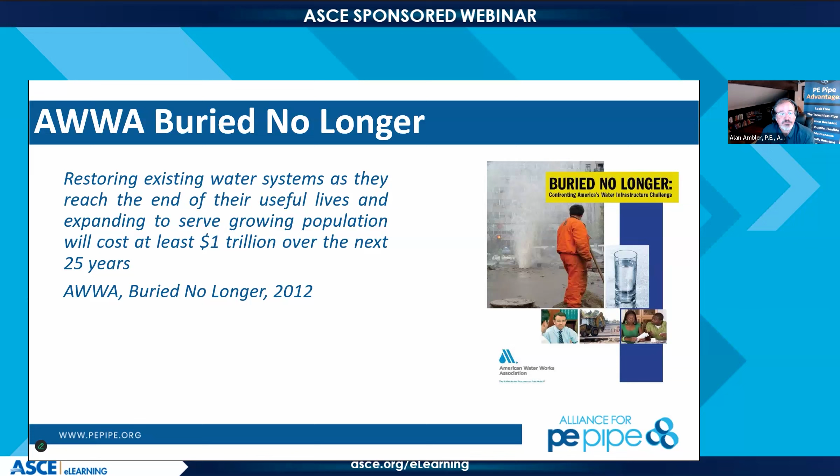So where are we industry-wide? AWWA Buried No Longer came out in 2012. It shows that we need at least $1 trillion over the next 25 years. We fast forward from 2012 to now, and this number hasn't abated. It's still pretty significant as to what is necessary to make your program funded, to go out and proactively replace that existing infrastructure.

There is a water main break every 2 minutes. That's a lot. That's not like 9 a.m. on a Tuesday after you finish your coffee. These things happen on Christmas morning, during the Super Bowl, that type of thing. So there's all sorts of emergency response that happens at the municipality to go out there and fix that infrastructure. We want to try to move from a reactive progression to a proactive progression, to go out and proactively replace this pipe.

HDPE can be used quite a lot in order to help you move to that progression as well. Everybody needs more tools, not less, to be able to replace our infrastructure as we see it. The Alliance tries as hard as we can to provide you with different elements to make sure that happens.

It is a leak-free pipe. That joint, when we fuse that pipe together, whether butt fusion, electrofusion, or some other type of fusion, is as strong, if not stronger, than the pipe itself. That's part of melting that resin to certain temperatures, allowing the molecules to flow across that interface, and then allowing it to cool. That joint is as strong, if not stronger, than the pipe itself.

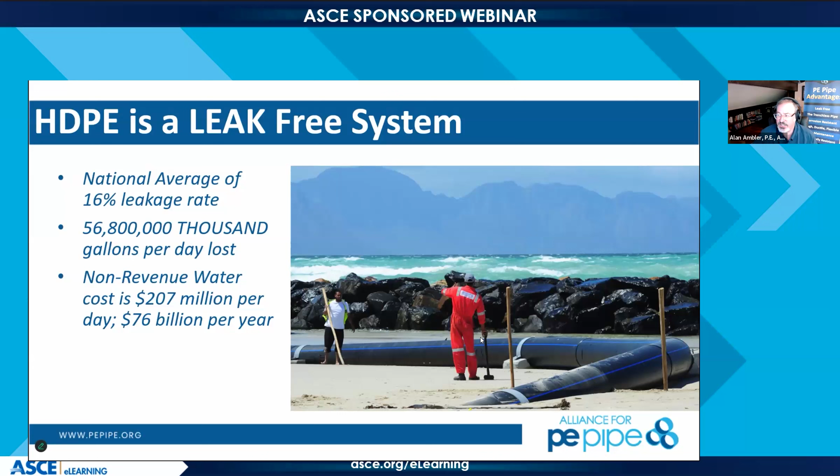It also provides that leak-free system we're looking at. There's a very significant amount of water loss in our national average of systems, and unfortunately there's not a lot of cost associated with it because we're undervaluing that particular provision of potable water. So even though there's a significant amount of water loss, sometimes we're not tracking it to the best of our ability, and we're not truly looking at the potential cost for it.

How do we look at it from a distribution and collection perspective? This is D&C that we're looking at. Based on all of the maps that we have, GIS records, as-builts, and other things, that allows us to look into our system and manage and operate it as we go through here.

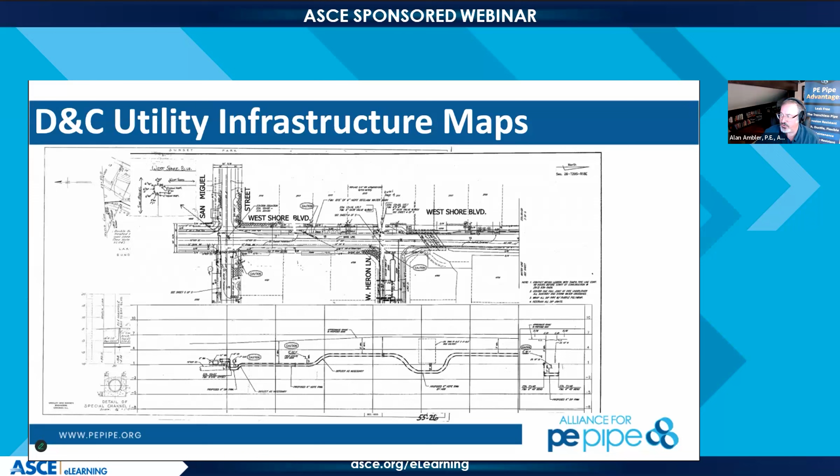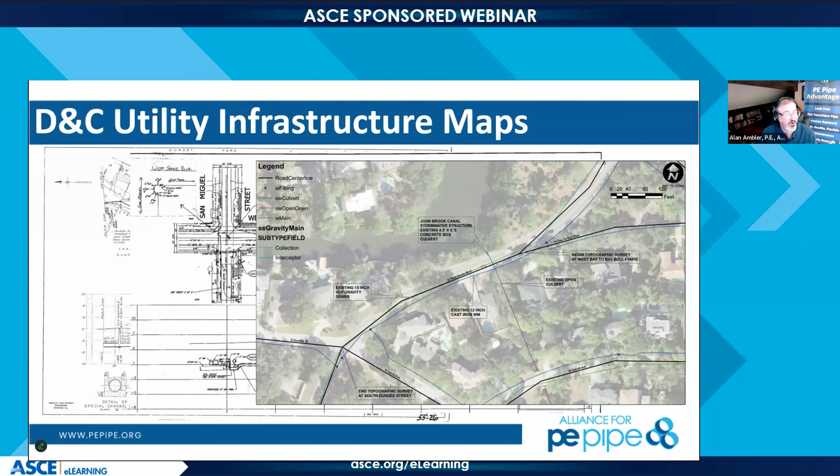Here's just a few examples for you as to how we start to pull all of this information together. A geographical information system, a GIS system, has data associated with mapping elements. We put those two together, and now we're finding all of our line work, which is our pumps and our pipes and other things of that nature. We're merging those things together to provide the information necessary to go out and maintain a system, and then also start to design a rehabilitation project.

Our distribution system has two components. Not only is there a reaction effort when we fix a break, but there's also the quality of the water inside the distribution system itself. Sometimes that water, if not used, can get a little old, or other contaminants can be in that process, especially if we have corrosive pipes, such as cast iron, ductile iron, or other metallic type pipes.

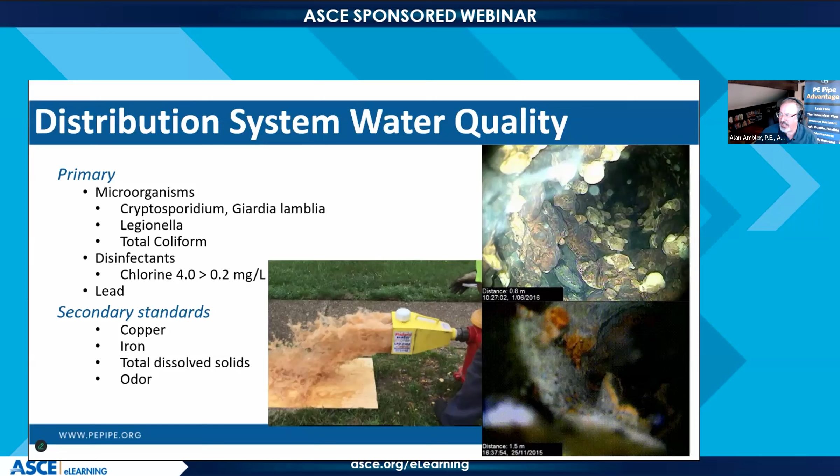So what are we looking at for the main lines? We go from main lines all the way to service connections, and in between, we really want that pressurized pipe to provide design pressure that allows us to operate the system at that particular pressure. We want to be able to provide for firefighting in its largest demand period. We want a life expectancy of 100+ years.

In parts of the country, we have a frost line, so we typically want that pipe to be below the frost line. Most of these main lines are located within a road right of way, in which case we have to make sure it's protected and free and clear of third-party utility conflicts.

So Steve, you came on. Did you want to add something to us here?

You spend a significant amount of time, Steve, on the operations and distribution and collection side to facilitate repairs and also installation of new pipe. So I'm going to hand it over to you now, and we'll keep talking about distribution systems.

Right, thank you Alan. As a waterworks distribution company, we're the guys you call when this happens, to put a repair band on that. The nice thing about polyethylene, though, is this kind of thing just rarely happens, because this is probably a corrosion issue over time, or a ground shifting issue that opened up this catastrophic leak.

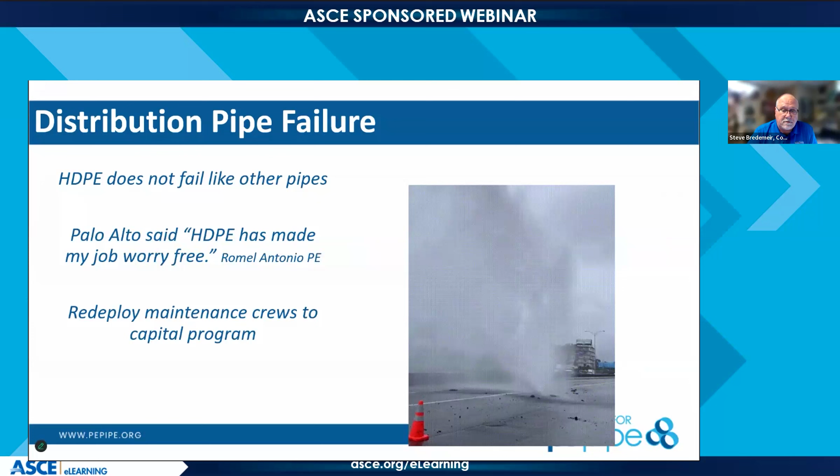And it's just the kind of thing that really doesn't happen very often in the waterworks or in the polyethylene world, because things like that, if it was in a gas main where they already use medium density polyethylene, those things are all on the news. These are fairly rare in the water industry. So, thankfully for that.

Yes, so we've got some case studies as well, Steve. There's a bit more meat that comes with the presentation itself, but I think we're going to go to Erik right now to talk us through this Albuquerque water main project he's been working on. So we're certainly interspersing some of the case studies with all the other information.

Yeah, thanks, Alan. So, yeah, I wanted to discuss the To'Hajiilee project that we are currently working on in New Mexico. We're right at the end of this, getting it completely put in the ground, buried, and in service and ready to go. It's been in the works for the last year or so now, but I wanted to visit this project because of the impact it's having, as well as the diversity of the HDPE being used and how they used it to accomplish the goal at hand.

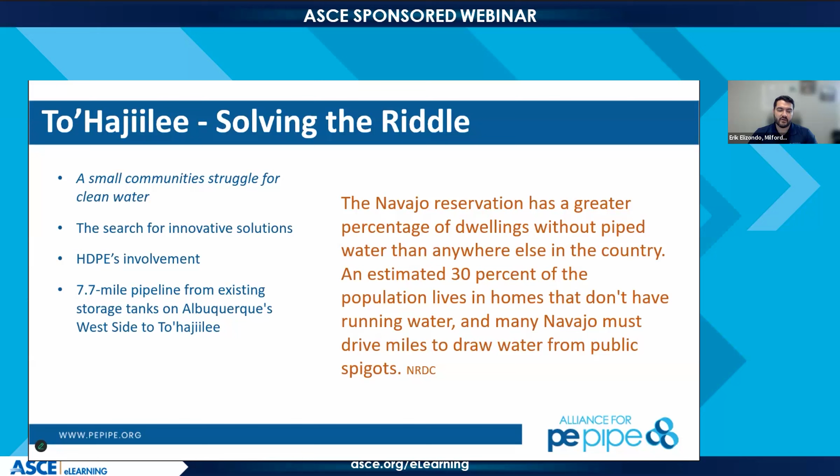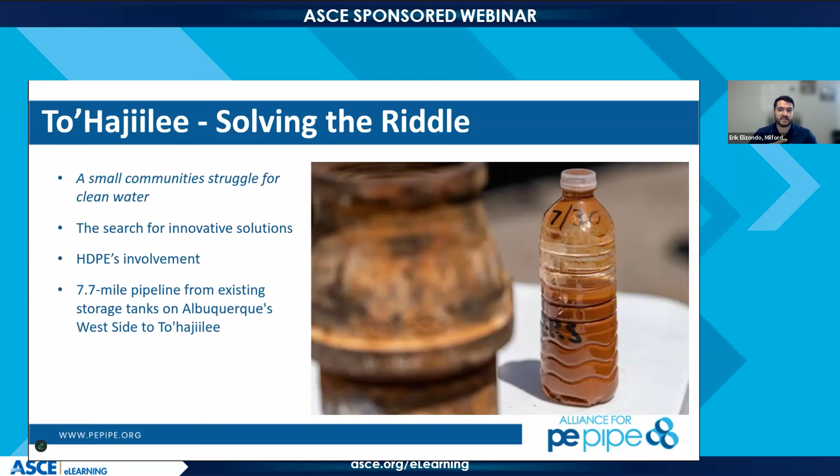Little fact: 30% of that population lives without running water in their homes, meaning they need to go to wells or bring in water from elsewhere. 30% of that population did not have water regularly running into their houses like we do day to day. I don't know about y'all, but considering what that would be like would have a huge impact on our own independent day-to-day lives, right?

And so the reason we want to talk about this is HDPE ended up becoming the solution for this small nation struggling for water. The county commissioner made a huge push. They had a lot of issues with land easements, dealing between the municipalities and the nations, and she made a huge push to get this through so they could get some type of water line put into service for these people, which actually ended up being decided in 2020, when she pushed for it.

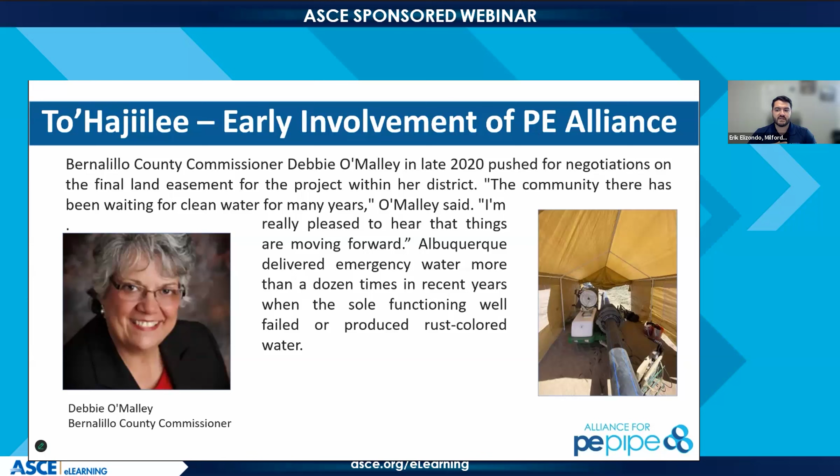The project ended up going off at the very end of 2023. All through last year it was a project in the works, and it's been wrapping up at the beginning of this year as well. But part of the problem was figuring out how to get the water from so far away to where it needed to go at the best overall cost, without too many changes in materials, and accounting for the differences in elevation from the origination to the ending point.

So from the beginning, we actually had Souder, Miller and Associates Engineering hop onto one of these presentations and hear about HDPE and all the things we talk about, and it sparked an idea about attacking this problem using HDPE. At that time, I believe that was back in 2022, when they reached out to PE Alliance and started getting more information and building a solution to the problem, which they would then present as the plan.

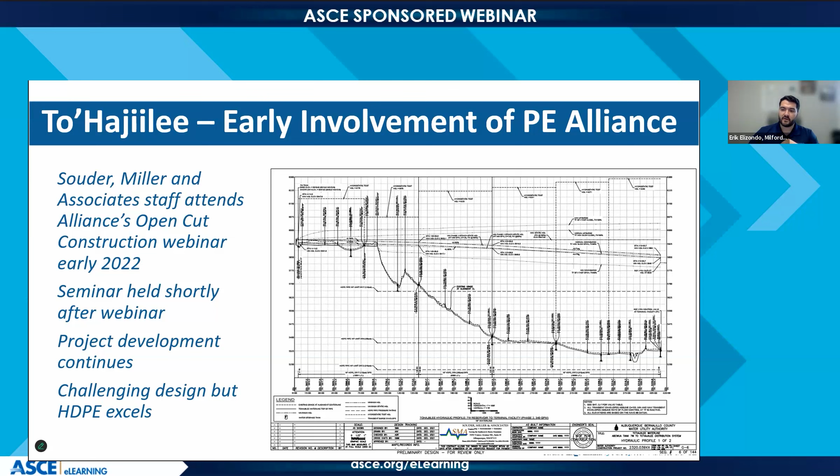So they hopped on this. We talked about HDPE, how to use it and integrate it into the system, and came up with a plan to install 7.7 miles of water line using HDPE, connecting to the Albuquerque Bernalillo County Water Utility Authority and taking that all the way out to To'Hajiilee.

Obviously there was all the back-end stuff to get the leasing done and the appropriate permissions done as well. That happened after they had the solution. The project came out for the world, like I said, at the end of 2023. Myself and my team in New Mexico partnered up with AUI out in that area to figure out how to help them accomplish this and get the best overall solution and pricing, saving wherever we could.

AUI had done projects in the past, but something like this was a little different than some of the things they'd done before. So utilizing the training we have to help them learn the water side of it all and

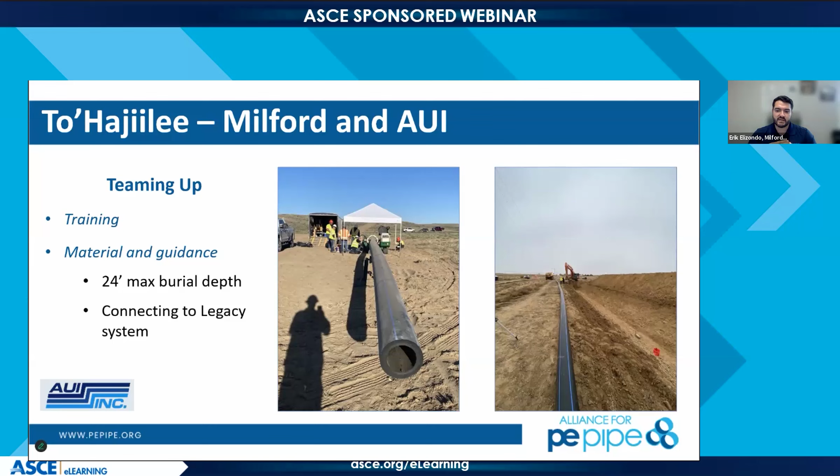help them learn how to install it appropriately was something that Milford and us teamed up on. Again, in this project there was DR7, DR9, DR11, and DR17. For those who don't know, that's basically the thickness of the wall of piping with a different pressure rating. The reason for the different DRs in this project was to accommodate for the elevations utilized here to maximize the flow.

The great thing about HDPE is that even with different DRs, you can fuse them together and they work like one consistent monolithic system, as HDPE is intended to do, right?

Between the beginning of Souder, Miller and Associates, to the PE professionals, to Milford, all the way through to the actual installer, there was an idea, a concept in mind in order to achieve this. Through the help of everybody involved, everybody on this webinar, we were able to get that installed.

So I see a question from Hector. I'll go ahead and answer that live. It is possible to butt fuse different DRs. The standard rule of thumb is to butt fuse either up or down 2 DRs from the DR that you are transitioning from.

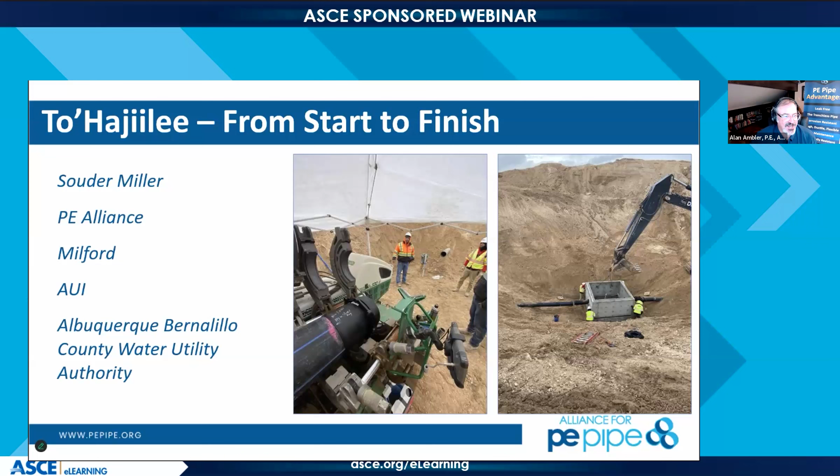I was going to comment on that too, Erik. Absolutely, thank you very much for clarifying. Our audience is always astute, and they're always right there to help us with this good information. I'm so glad it shows you're paying attention.

That's exactly what we want, for you to be able to pay attention to it. So we're going to move now into main lines and open cut. What is it that we look for through this open cut installation of the pipe itself? Steve, you want to take over and tell us about open cut?

Well, it looked like from Erik's pictures that most of his project was open cut. That's just the standard way to put in most pipelines in the industry, whether it's polyethylene or something else. I think we get into a rut where everybody looks at HDPE just for directional drilling, because it's about the only product you can use. But it works great in open cut.

You can narrow down the trench and not have anybody in the trench when you go to rope it into the trench. So a big part of the future for HDPE is just to put it in like you do other pipeline systems. One of the nicer things is you can narrow the trench because you don't necessarily have to have a trench box at all the points when you're digging, because of the flexibility of the product.

So maximizing productivity here, absolutely. By not having anybody in the excavation, we're simply able to take advantage of that long fused run and maximize that productivity. You're absolutely right, Steve. There's a backhoe that's just sitting there opening up trench. They're not stopping every 20 feet to lower a piece of pipe and home a bell.

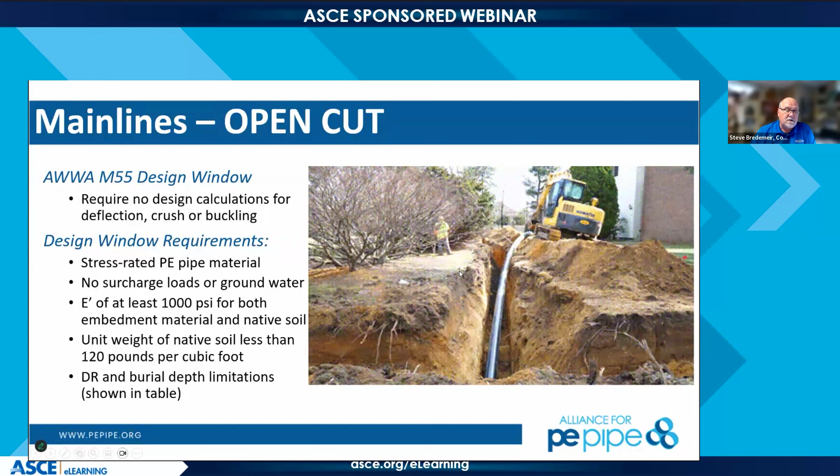So the design really isn't too difficult when it's exactly like other products you've designed in the past. We have the design manuals for polyethylene M55, and really in most cases there's not a lot of extra work you need to do to figure out compaction and things like that, because there's a design window that allows you to install pretty much like you do for any other piping product you're used to using in the waterworks industry.

But you can see we're able to put it around this S curve and eliminate some of the bends that would otherwise be necessary, or fittings, by taking advantage of that allowable bending radius of HDPE that we have.

Hey Alan, on that, yeah, last, we got a question in the Q&A. It's a great question, we get it from time to time. I'm hoping you can address it head on. If you're not going to have someone in the trench, how do you ensure proper compaction?

So mechanisms to be able to ensure proper compaction - this same excavator that we're looking at, they can take the bucket off of the front and then have some type of tamping or compacting tool on top of this excavator to be able to go through and make sure that you get that necessary compaction as we come through.

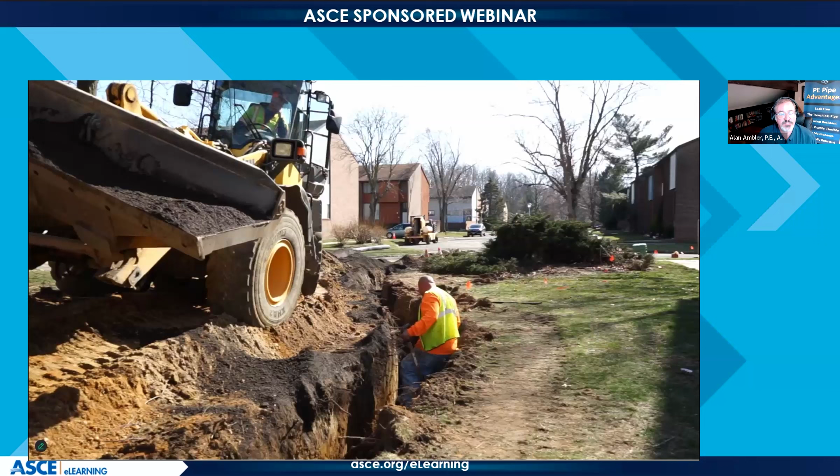Most of the compaction isn't necessarily for the pipe's health - it's going to be for the things that are on top of that pipe, to make sure that we don't settle flexible asphalts and other things of that nature. So great question, that's another function of having that parallel track here.

Erik, you got something to add? No, I'm just gonna go ahead and get on to the next slide. Absolutely, I do have something to add on the last slide.

The one difference between polyethylene and other products is, in that case, we don't need to put concrete blocking behind any of the fittings because it's a completely fused and restrained system. So you can eliminate all the concrete blocking that you typically design in a PVC or ductile system, because those concrete kickers are there to keep the bell and spigots together, right? Well, we don't have bell and spigots, so you can eliminate all that extra concrete blocking, which can save quite a bit of money and certainly time.

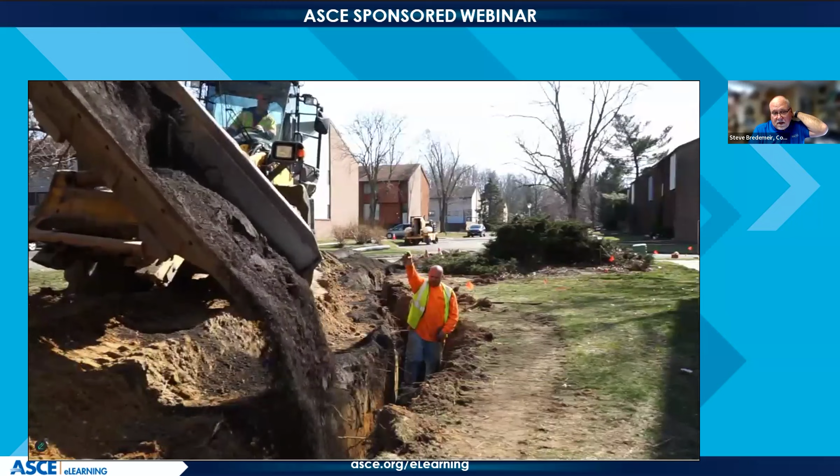Yeah, that's a great point, Steve. So, kind of elaborate on what you're talking about with the differences in HDPE in regard to other materials. A lot of times, when we start looking at connecting the legacy systems or using the legacy system products that have been used forever, like valves, a lot of times there's confusion on the connection to those materials.

The cool thing about HDPE over the last, I don't know, 25 plus years at this point, is the adoption of different types of fittings to be able to connect up to the legacy systems, allowing us to use all the same valves you would use in a standard PVC or ductile iron piping system. So with HDPE, you still have the same opportunity to use the exact same valves you would have used - you can still stick with your standard expectation for those fittings.

They came out with the MJ adapter, which you see on the slide, that is connecting directly into the valving system, which has an internal stainless steel stiffener to help with expansion and contraction at that conjunction, and connects up and bolts up the same way that you would connect up and bolt up with a Megalug or traditional PVC or ductile iron, right?

And that creates a completely fully restrained system. So your MJ adapter is fused onto the pipe or the fitting, and then onto the next pipe and the next pipe. And then when you come to this mechanical joint connection, the restraint is those, in this case, blue bolts - you would have to break those bolts to pull that apart. So that makes it a fully restrained system using the MJ adapter.

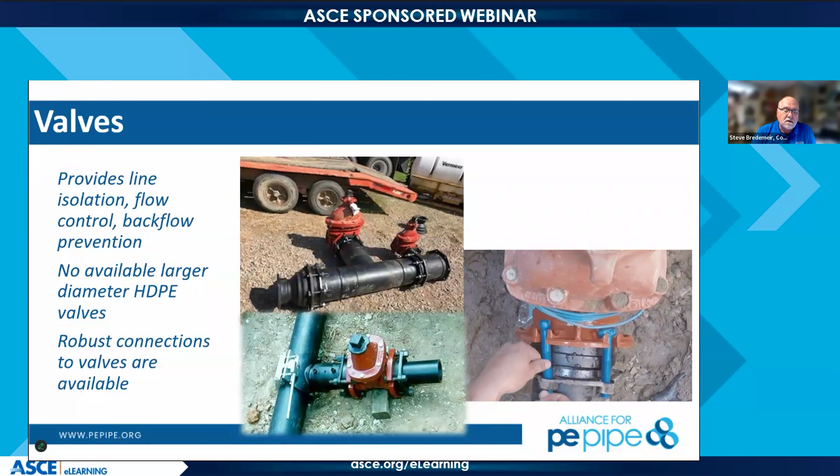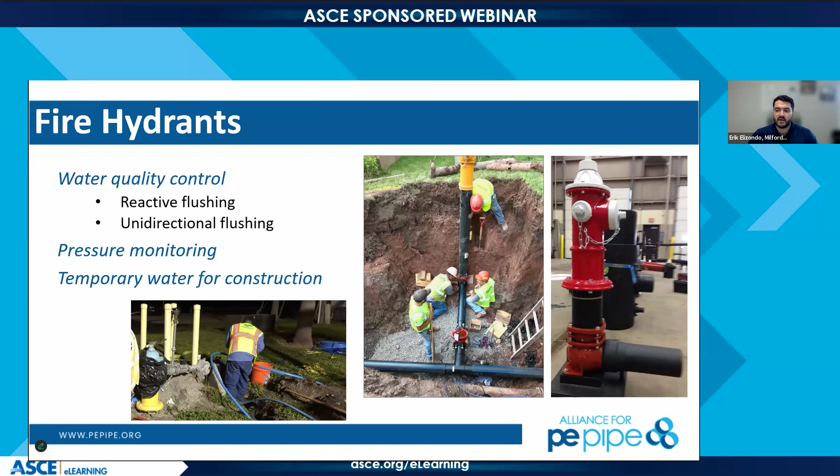So again, same thing - HDPE has taken a long initiative on trying to make it easier to utilize this in your potable water systems, or any distribution systems and collection systems as well, in order to integrate this into the system with little difficulty and/or resistance.

So this is the most common use of HDPE. You see this in conduit all over the country and on the gas side. But you can do main lines with HDD, horizontal directional drilling. This is just an alternative installation method, and it is by far the most common use of HDPE.

You can install it by pulling it in, creating less of what I like to call construction destruction. You don't have to tear up the entire road and haul off all the spoils and haul back in all kinds of backfill. You can fuse this long run of pipe together on top of the ground and then pull it into place, avoiding a lot of that construction destruction. Some fairly brilliant people in our industry said if you're going to use it for the hard stuff, let's use it for the easy stuff as well. So that's just part of it.

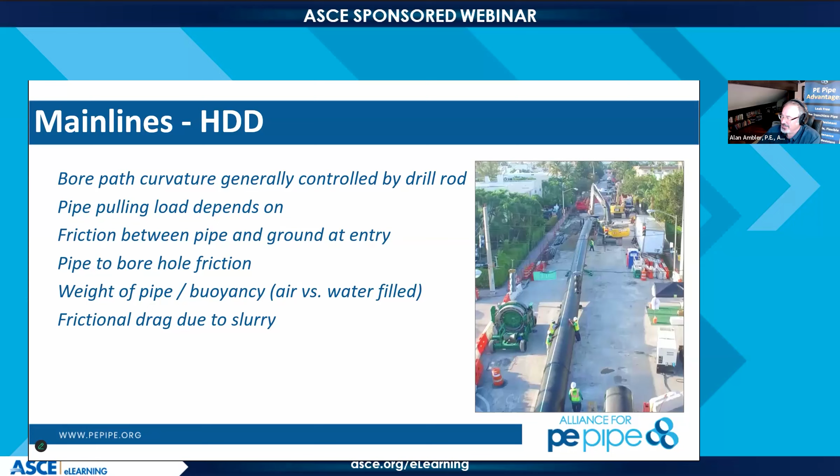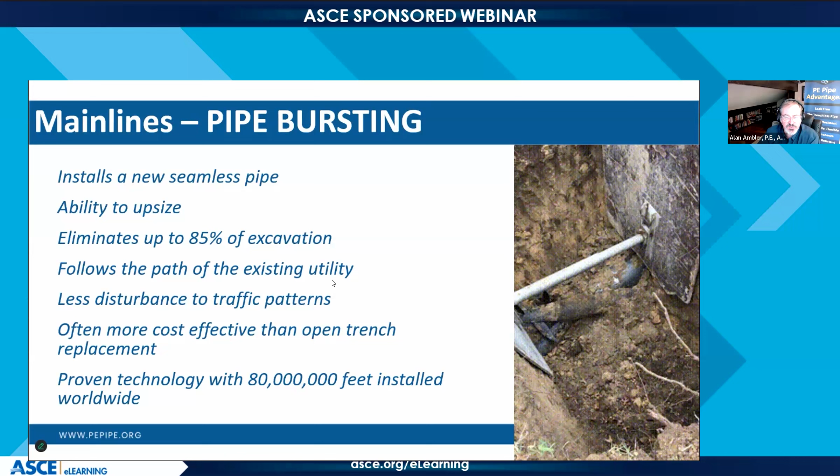Here's pipe bursting, which is the only trenchless technology rehabilitation method that can put back a larger OD pipe than what existed. Pneumatic pipe bursting uses an impact hammer driven by compressed air, and only uses HDPE through that process as it moves along, continuing to break the old pipe to create a temporary soil cavity surrounding it and pull back the replacement pipe. Static pipe bursting can use different pipe materials, but is just another way to provide the force required to do the bursting.

Slip lining itself is another rehabilitation method for existing pipeline, and it functions in the same fashion. We're essentially getting access to that pipe as we're putting new pipe within the existing pipeline, making sure it's clean and clear of obstructions through that process. Then we're pulling the HDPE pipe through that existing pipeline to be able to fit the brand new pipe to do what we need to do with it.

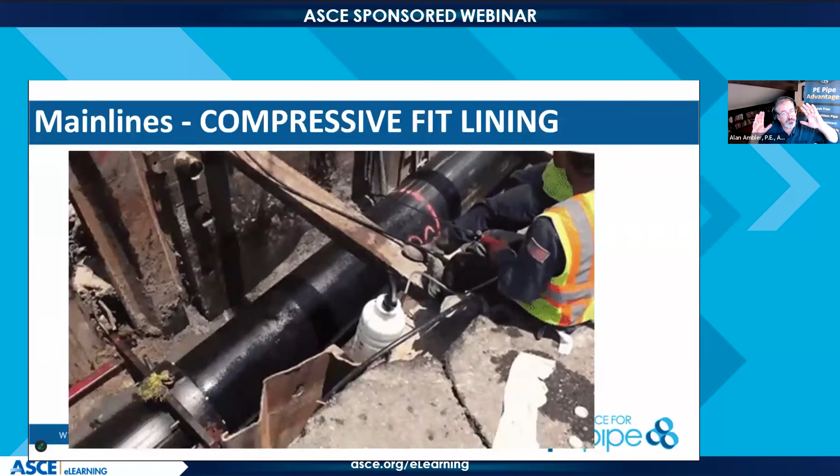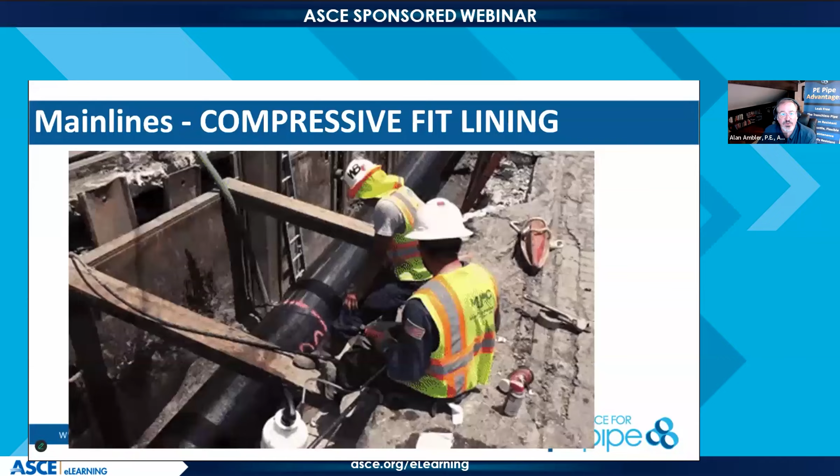Now, if we take that slip lining and put it on steroids, we get compressive fit slip lining. This is only done with HDPE. We're reducing the OD of that pipe through this die temporarily, and then allowing that pipe to relax, so it forcibly pushes up against the ID of the pipe we're slip lining through. It's taking advantage of the viscoelastic behavior of HDPE to provide this.

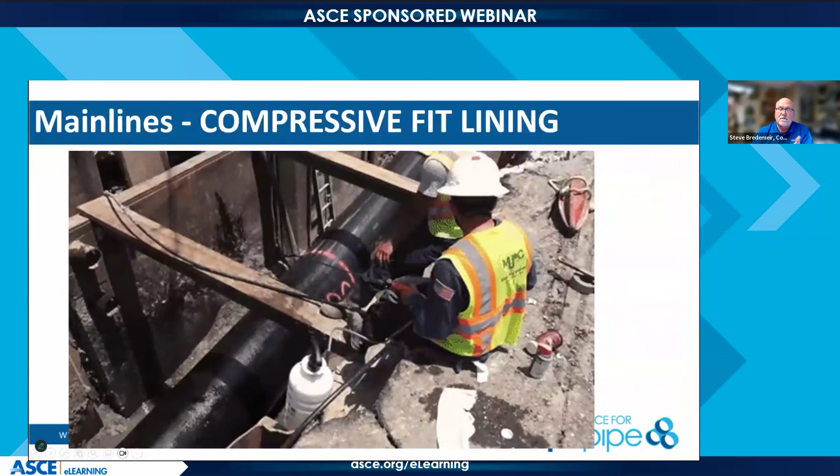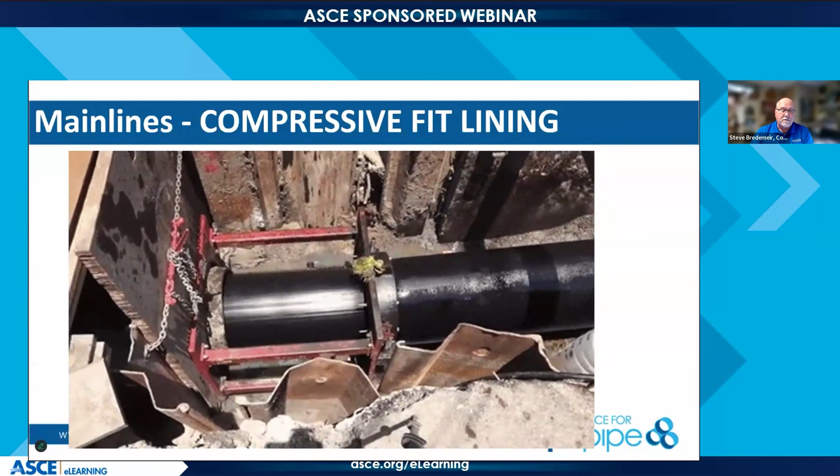So, Steve, take it away. Yeah, I'd like to point out that these last three installation methods—pipe bursting, slip lining, and compressive fit—all take advantage of the fact that the utility already owns that right of way. There's a pipe already there. You don't have to go out and find a new right of way or a new spot to put this new pipe. You're basically rehabilitating an old pipe where you already own the right of way and upgrading it to the 21st century. I think that's an important thing to realize on the advantages of utilizing those installation method technologies.

On the pipe bursting front, the target audience is anything very fracturable. So we're talking brittle pipes like clay and cast iron—those are the target markets for pipe bursting.

So thank you for going back there, Alan. When we're building these projects, we're adding service connections when we put in a new water line or force main. Over the years, all these things have been developed for polyethylene. They were originally developed in the gas industry—we're basically copying the products used in the gas industry since the 1980s, so it's really not anything very new, because the entire gas distribution industry has been using these products for 40 years.

Now the sizes are getting larger for the water industry, because water is not as compressible as gas, so our water mains are larger than our gas mains. Some of the larger diameters have been developed more recently, but the service connections have all kinds of different options. In this case, the gentleman has electrofused what looks to be a 6-inch lateral, and he's drilling the coupon out of the main line. Obviously that's not a hot line, or he'd be getting really wet when he ends up cutting that cookie out.

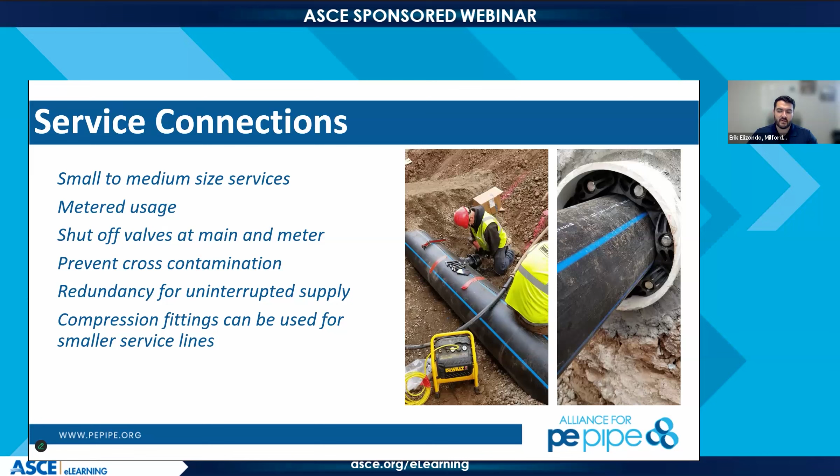But along with that, the ability to replace a line and connect services to your users, your citizens, as quickly as possible with doing something like a pipe bursting installation, just pulling it through, not having to open that trench, and all you have to worry about is reconnecting service lines, and how promptly and quickly you can go to it has been one of the biggest reasons SAWS has adopted it the way that they have.

And like you said, the cool thing about the HDPE is that there are several different ways of connecting those service lines. You kind of touched on it a little bit. There's still just the standard mechanical versions that you see in the other materials. On the next slide, it'll show the electrofusion versions of that, and two different ones, right? So there's just the standard electrofusion with a threaded outlet to connect up the same way people have been doing it for as long as can be. And then on there you have a tapping tee.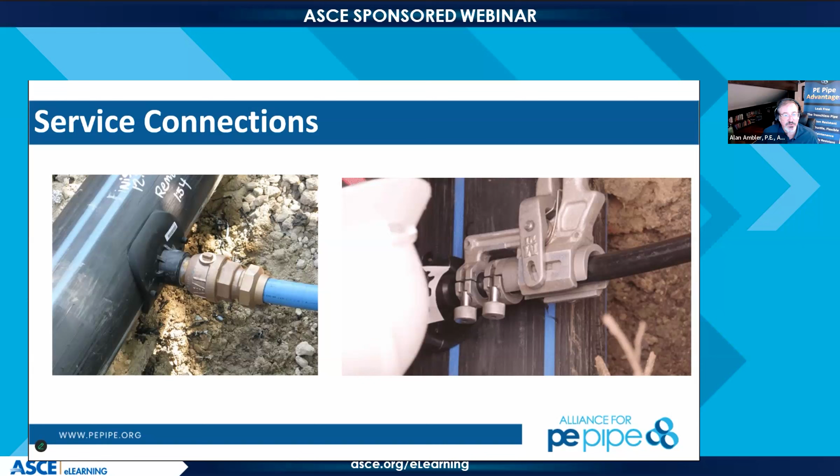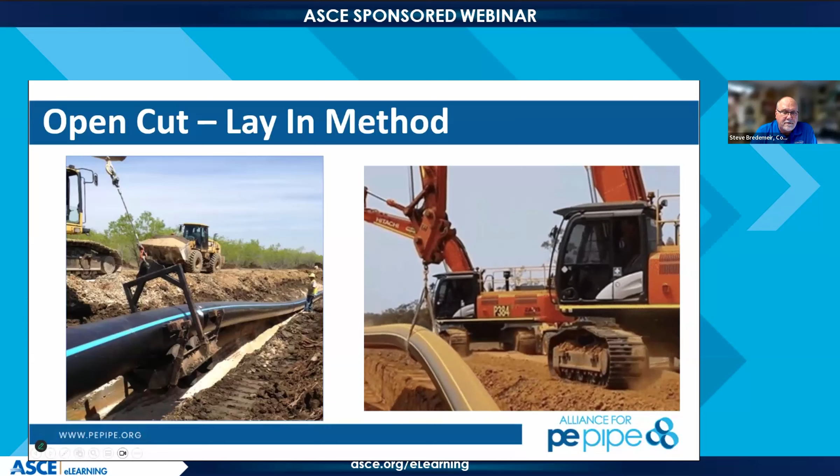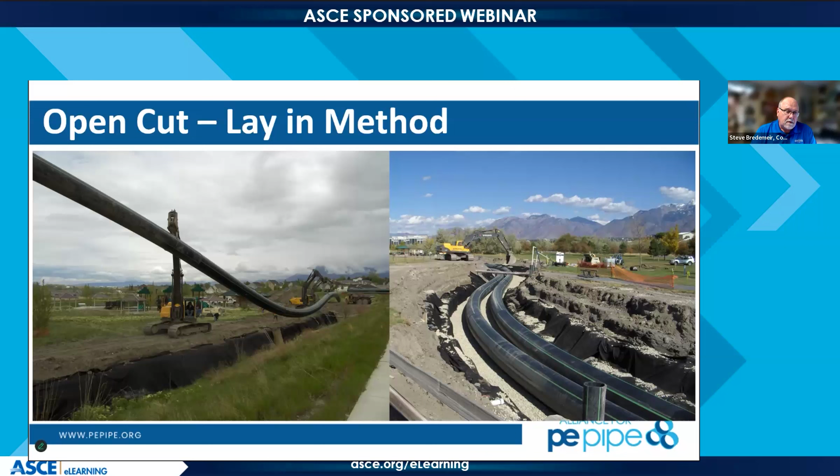These are just more great examples of how you can use polyethylene in the standard way of laying an open cut pipeline. They're roping the pipe into the trench. Obviously, those slip lining and directional drilling jobs are usually done in very highly congested areas, but when you're out in rural areas, you can get incredible production by fusing long lengths together and roping them into the trench, as you can see in these two pictures.

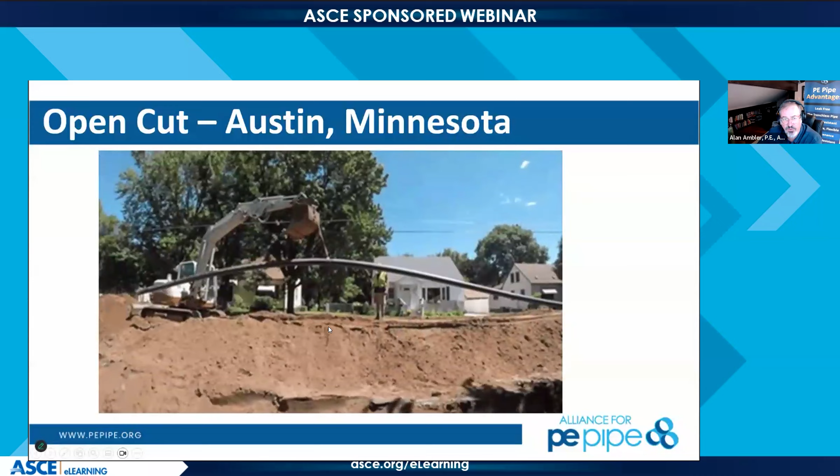This is another example of a municipality that decided to replace everything at once. So they're replacing the potable water main, they're replacing the gravity sewer, and we're simply taking advantage of that long fused run to be able to open up all of the earth at the same time. So there's certainly some convenience in this, but obviously these residents are impacted by this process. But one of the benefits of that long fused run is it allows for maximized productivity, and we're simply not in front of the residents for that long as we go through.

Here's some guidance from the Municipal Advisory Board. Steve, maybe you want to tell us about that. Yeah, so the Municipal Advisory Board is a group of users of polyethylene, so municipalities and water departments that came up with some standards for, in particular, electrofusion, which is just another type of fusion. There's butt fusion, and then there's electrofusion that are used commonly in the polyethylene industry, and they're really the same, other than where the heat source is coming from. For electrofusion, the heat source is coming from resistance heating wires that are built into the fitting, and we run a current through those wires, and that's the source of heat.

Well, the Municipal Advisory Board came up with some standards for installing these in the various sizes. And the reason they did that is because the manufacturers of these products all had their own standards. They were very similar. And this was true in the early days of the polyethylene pipe world, each manufacturer had their own standard for fusing their pipe. And then eventually they got together and created an American standard for fusing pipe that they all agree on. This is the beginnings of that. And you can get your operators trained to these standards, so they install these products properly. It's pretty straightforward. And again, each manufacturer has varieties of this, but it's all the same.

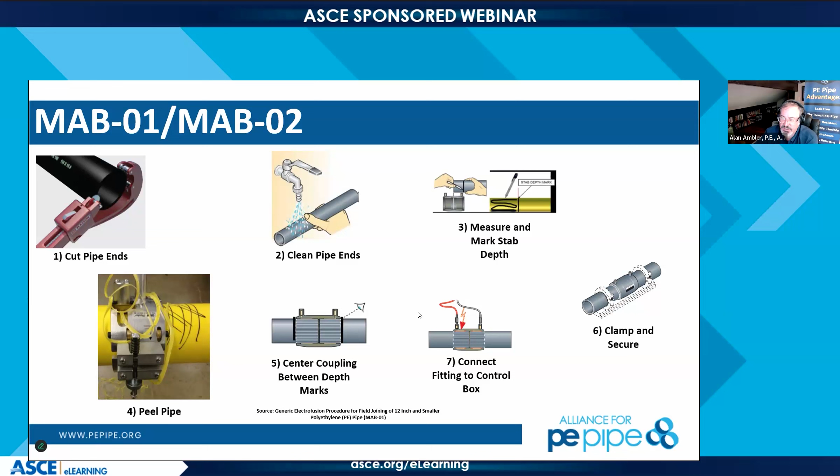So we're doing the same thing with all of this, with treating HDPE, when we get back to that virgin resin material, and we're heating it to appropriate temperature, whether it's butt fusion, electrofusion, extrusion, any type of fusion that we're looking at, we're getting to that virgin resin material and allowing those molecules to go across that surface. There's a little bit more operator-intensive stuff for electrofusion, but once you're properly trained, it's just as simple as all fusion itself.

And this slide just shows the anatomy of an electrofusion coupling. There's two zones. You're fusing two different pipes together with a coupling. You have 3 cold zones and 2 hot zones. The cold zones are there because once the material becomes molten in that section where the wires are, we don't want that molten material to flow outside of the coupling. So once that molten polyethylene material hits that cold zone, it starts to dam up and create pressure to allow the materials to mix between the coupling and the pipe.

The best analogy I can think of, if you can imagine the Hawaiian Islands when a lava flow happens, how that leading edge of the lava kind of curls back a little bit. That's what happens in the cold zone. And then that eventually stops, and then it builds up pressure, and that allows the materials to mix and create a fusion. So we're not really melting it, we're fusing it.

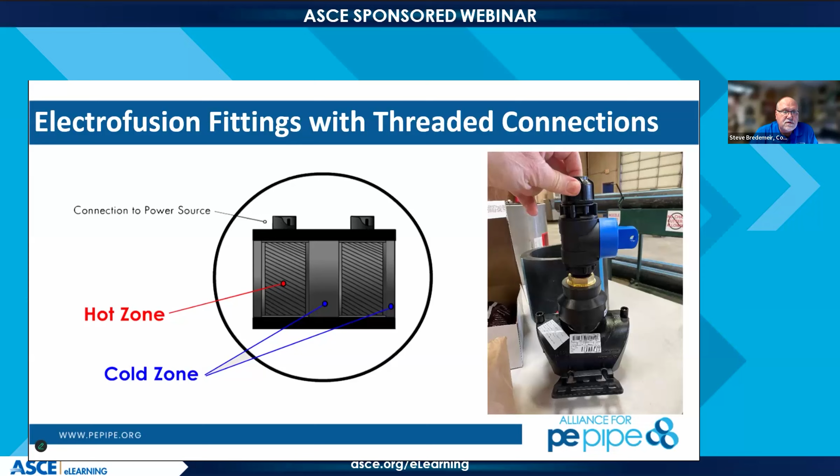Not sure if there's audio with this. There is. I muted it. I didn't know if you wanted to just talk over it. Erik, did you have something that you wanted to contribute there? I was going to talk to that further in a minute.

A lot of times, in the process of adopting HDPE, there's that learning stage of the appropriate ways to do things and making sure that the people doing it are certified and know what they're doing. And one of the most important parts of either butt fusion or electrofusion is the preparation. Especially with electrofusion, the preparation on the piping and on the couplings is very important.

Making sure you have a clean surface that you're working with, making sure, like you said, you get to the virgin material and have enough of the exterior of the piping peeled for the electrofusion couplings to come in contact with. And just making sure that your site is appropriately prepared for that is a huge thing, but it can be a huge help in scenarios where you're having to align piping that you don't have a lot of give, or when you're in tight spacings to be able to connect up.

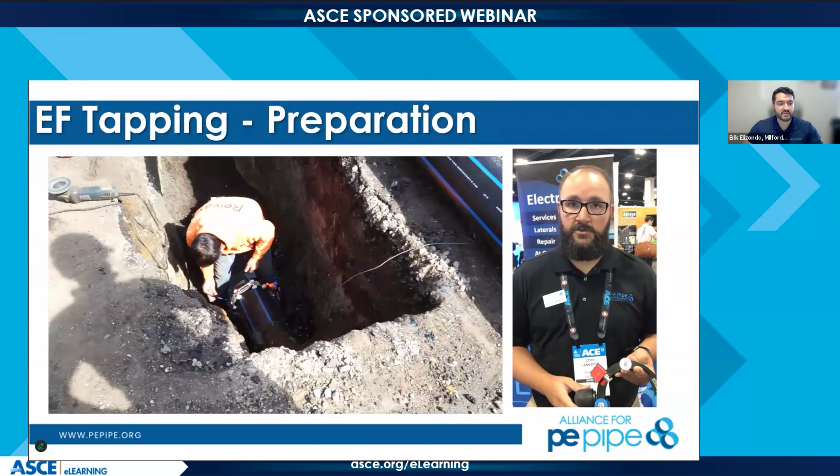Electrofusion can be a solution where you can't necessarily get a machine in there, and that's typically the areas in which we try to recommend using the electrofusion, in compact areas. And that's a great point, Erik. That mention of training and certified trained, that you only want people that have gone through the training. It's not that hard. Like I like to say, I'm qualified to teach this stuff, so it can't be that hard. But you do need to be trained, and it's every 2 years, because we know people pick up bad habits.

But like I say, it's a very easy process, but you as a designer, an inspector, or whoever you are, you want to make sure that the people doing the job are qualified to do it. And that will ensure a good project. This tool looks like it's pretty intuitive, and a lot of the designers of the tooling have thought through some of the efficiencies for us here as well.

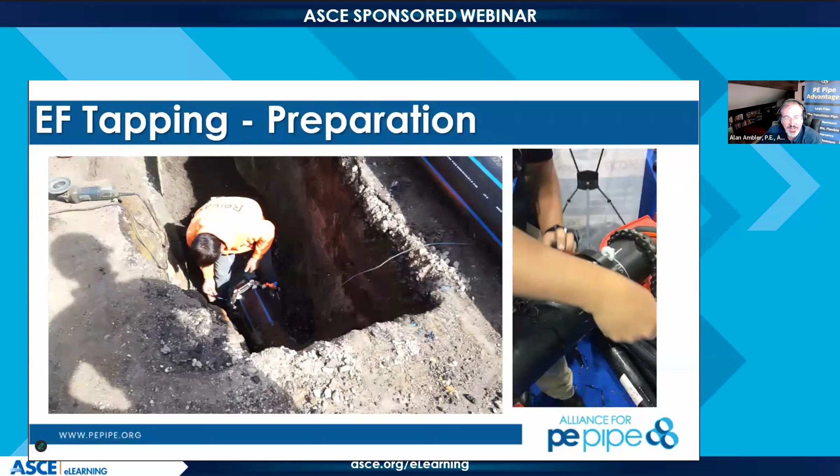So, I mean, he's just popping that on and going right through it, but we still need to maintain and understand the principles of why we're doing this type of work, and that's part of that training process itself. So, 20 years ago, a paint scraper was okay to use, and it's no longer okay to use because the tooling has gotten up to speed, for sure.

This is just a little example of a tapping tee that's electrofused on. You can see there on the left that they scraped it, or peeled it, and then on the right they're showing using the T-handle wrench to actually turn the cutter so that the tap machine is built into this fitting. They just take off that cap, put that T-wrench on there, and screw it down into the pipe.

The cookie threads into the brass or stainless steel cutter, and then when you back it back out, the water turns on. So it's a really slick system, and like I say, there are millions and millions of these in utility systems in the United States, and they're on the gas distribution side. So if anybody ever says we don't want to be the guinea pig, they're not the guinea pig. The gas industry has well vetted this product.

Absolutely. So this is called live tapping. So the water in the pipe doesn't shut off, so that way we don't impact all the residents as we're putting in a new service.

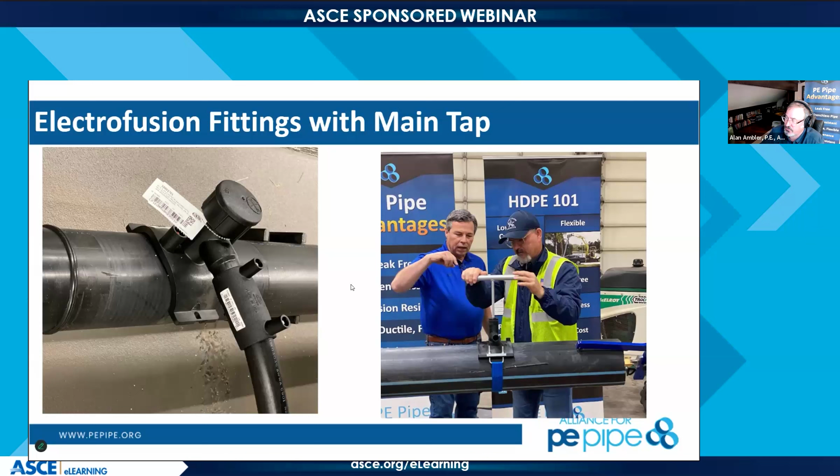So we've been reminded we've got to move along pretty quickly. So let's keep pushing through.

So what we're seeing here now is tracer wire. So high density polyethylene, or any plastic pipe, does not convey electrical signal. So we need different things to be able to locate this pipe. And here we have an RFID ball that sends a signal to the surface, tells us exactly how deep and what type of pipe we're locating there, but then we're also pulling tracer wire, which conducts that electrical stimulus as we're coming through, and we put that through this process as well.

Not ironically, today's modern tracer wire is no longer that THHN meant for electric use in your house. It actually has an HDPE jacket on the outside, and the reason for that is because it's so durable and good for underground installation. Let's use it for that and for the main lines as we go through.

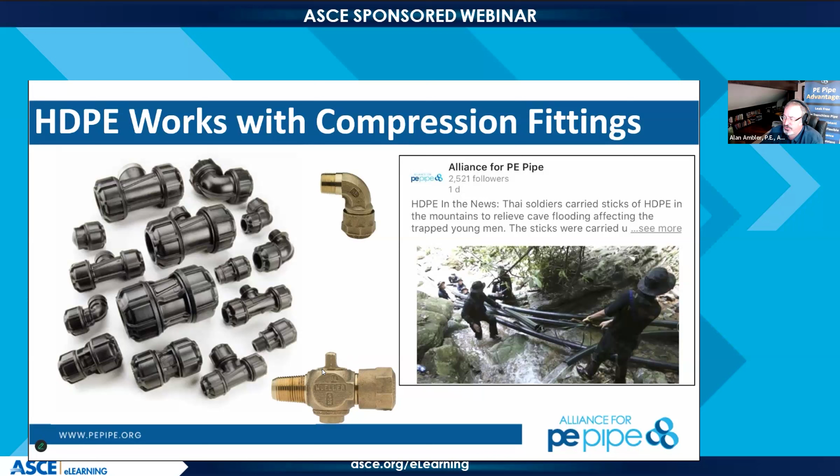As Steve has said, there are many different types of fittings, and these are just examples of the types available to you. Anything you have a preference for certainly works in that manner. We also work with compression fittings, all rated to 150 psi, as we put a compression fitting through this. This is often used for temporary service above ground or just that small service line. All those other fittings we've shown you also have threaded capacities to work with your favorite brass fitting.

Polyethylene is just so durable. You can drop it and it doesn't break. You can bend it and it doesn't break. But just because you can bend it a lot doesn't mean you want to, because you're storing a lot of energy. And just because you can take a backhoe and knock it off the back of a truck at a quarry, that doesn't mean you should, because that's obviously a dangerous operation.

So the industry, PPI, came up with proper pipe handling guides, which if you're designing an HDPE project for the waterworks world, I would suggest you refer to, because it's longer pipe, it's more flexible, and there are some considerations that are different.

Beyond that, the nice part for us as a distributor is that when we have material in our yard, all our pipe for the water industry is black, and the reason for that is it's basically sunscreen. They put 2% carbon black into the pipe material, mixed in with the resin, to protect it from sunlight. All that carbon black does is convert the UV energy hitting the pipe into heat, so it dissipates into heat rather than destroying the molecules of the pipe.

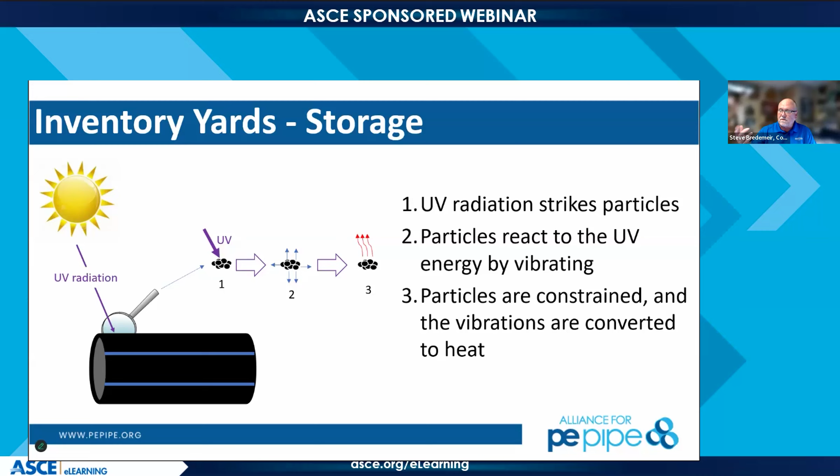If you had... I think there are some slides ahead that show other products susceptible to UV degradation, so we have to be careful cycling those products out of our distribution yard. We would never have anything like that in our pipe yards, but that's just pipe that sat in a municipality's yard for years and got damaged from UV light.

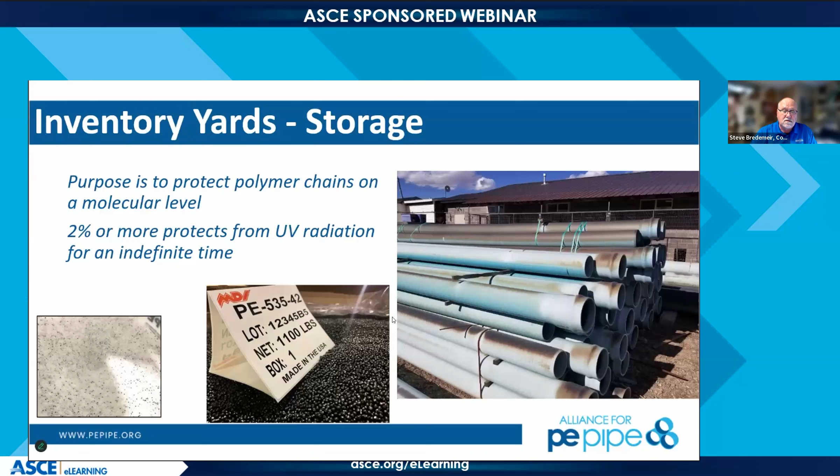The gas industry protects their yellow pipe, cycling it through and managing inventory to make sure it gets in the ground within 2 years of being manufactured. But that's not the case with polyethylene, with black HDPE. It's protected from sunlight for a lifetime. You can operate it above ground, like in those quarries, for a lifetime because it has the carbon black.

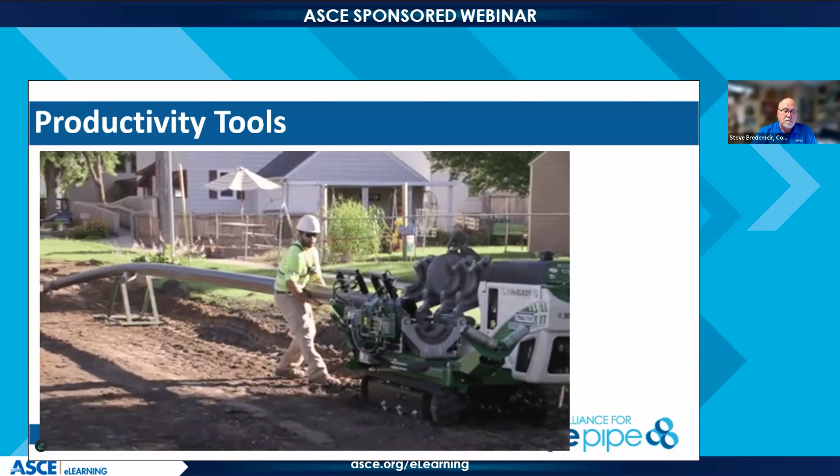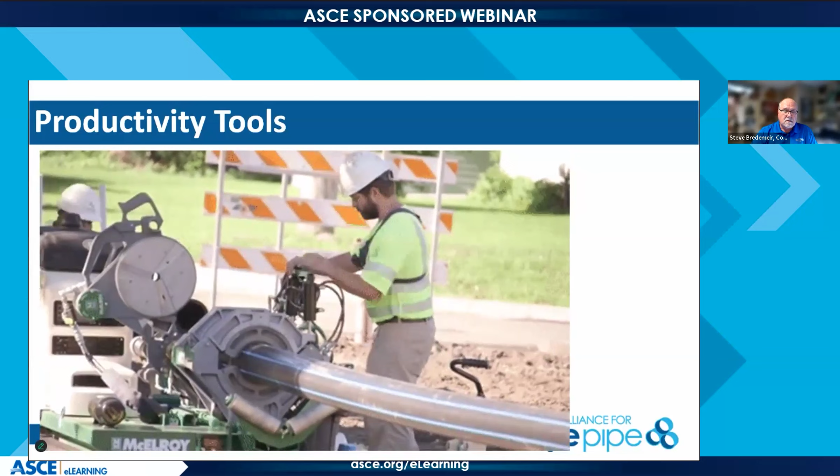Over the years, McElroy, the main manufacturer of HDPE fusion equipment, has developed many tools. The TracStar helps with productivity. The hydraulic clamps that clamp it down help with operator fatigue, and roller systems help get things loaded so you don't have a bunch of extra equipment on these medium-sized jobs having to load pipe into the machine each time. These productivity tools have really developed a lot over the 25 years I've been in this industry.

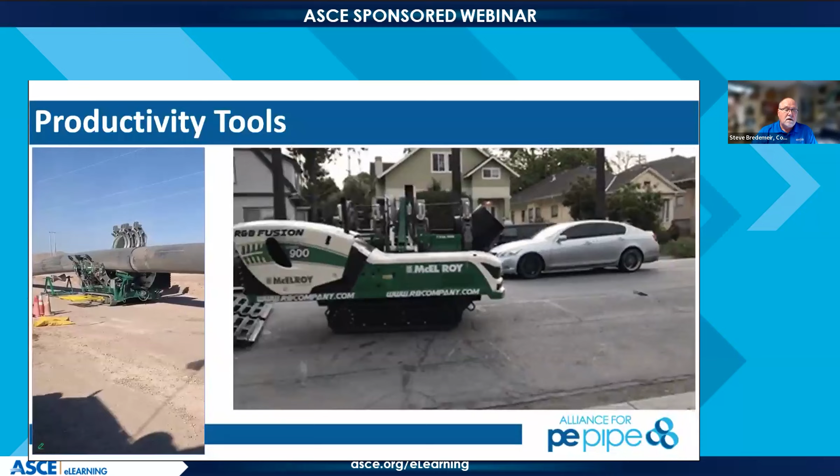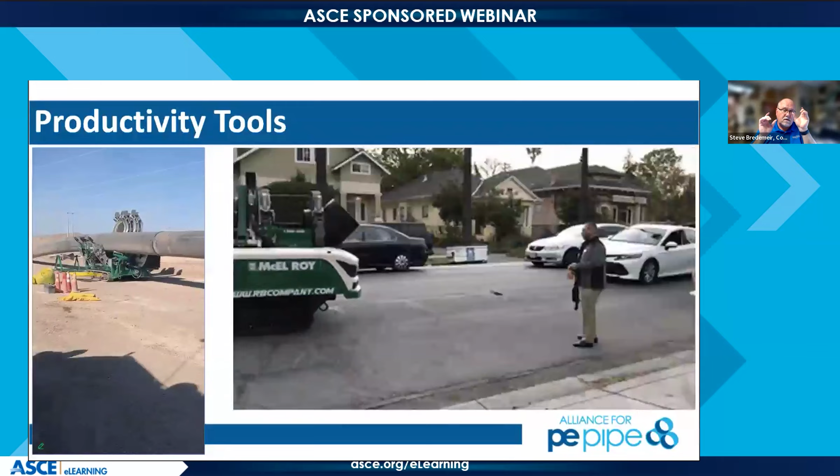They've really taken a big step forward, and so have the sizes of the products, the fusion equipment, because pipe manufacturers have gone to massive sizes and thick walls due to advancements in the resin, where they have new low slump resins that don't sag to the bottom as they're being extruded, so they can make very consistent walls with thick diameters. Polyethylene is getting into larger and larger sizes because of these tools and technology advancements over the years.

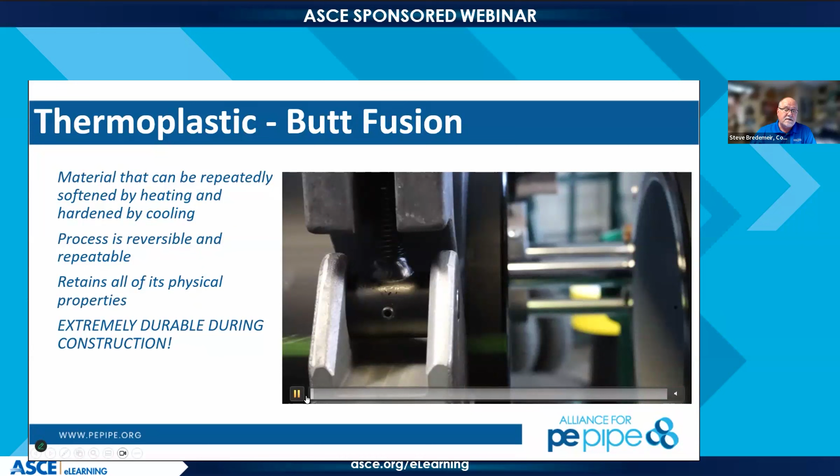So butt fusion is the most common way that we join HDPE. The reason we butt fuse it is because we can't chemically bind it, and because it's so resistant to any kind of solvent welding chemicals like PVC. PVC can be solvent welded, but polyethylene can't—that glue would just flick off after it dried. And polyethylene is so flexible that we can't really create a bell and spigot system because its durometer is close to that of the gasket. So we butt fuse it together, creating a leak-free system using heat and pressure, and that is the most common way to join the pipe.

We had a great question here: after fusion, how long do we have to wait before we start to move that pipe material? There are two parameters we're looking at. There's a rough handling parameter, which is waiting until it's fully cool to move it around—that's for installations via HDD or pipe bursting. And there's also a just-cool parameter, at which point we can move that pipe and fuse up the next run. That varies based on the DR and the size of the pipe.

So McElroy has what's called the McCalc app, which will tell you everything you need to know—there's an app for that—as far as when you can do rough handling or safe handling of the pipe itself.

But typically for the very large pipe, that 54-inch, 60-inch pipe, that is a real thing we look at for productivity for the person fusing that pipe. The actual process of fusing could take a half hour, 45 minutes to heat it up and then cool it down in that process. Great question—I'm glad you guys are thinking about it that way.

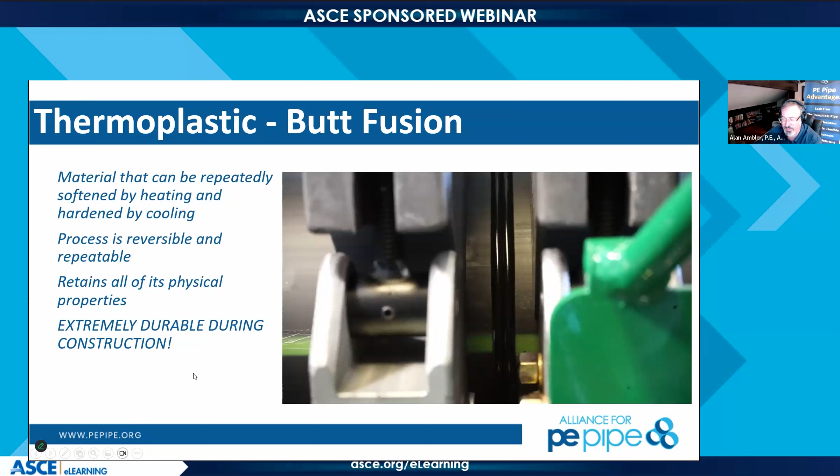The bend radius of polyethylene follows rules of thumb. A standard DR11 is 25 times the diameter, meaning you can bend a 12-inch pipe, which is 13.2 inches, into a 28-foot radius circle, or make a 90-degree bend in 44 lineal feet of pipe. That gives you an idea of how much you can really bend this pipe. The only risk is that if you bend it more than that, it would kink—it wouldn't break, it would kink like a hose. That's the flexibility of polyethylene.

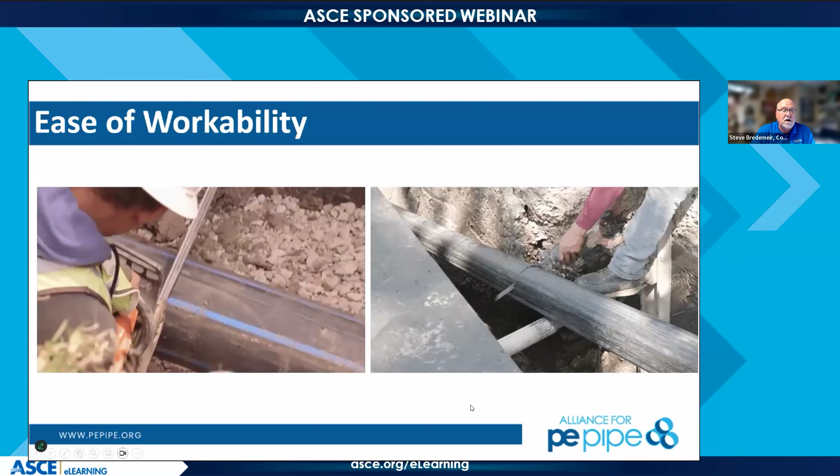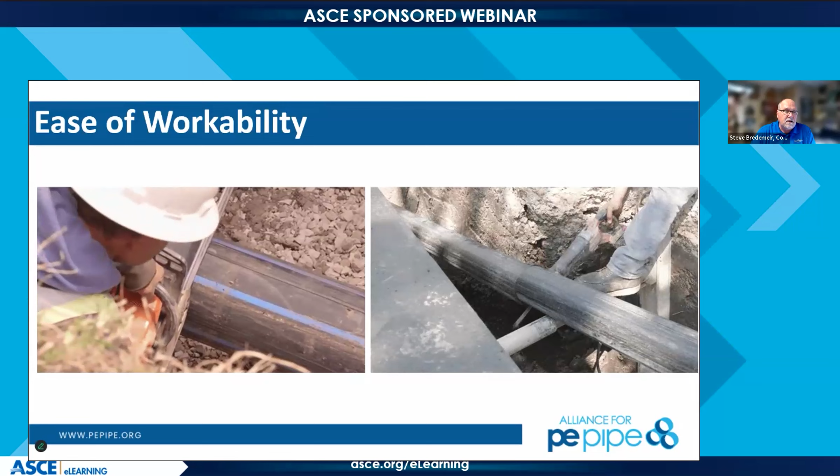It cuts very easily—we use a chainsaw or a saw. Basically anything that'll cut wood well will cut polyethylene well. We typically recommend a chainsaw without bar oil in it, because we don't want that bar oil to become a contaminant during the fusion process. But it's very easy to cut for fittings or connections.

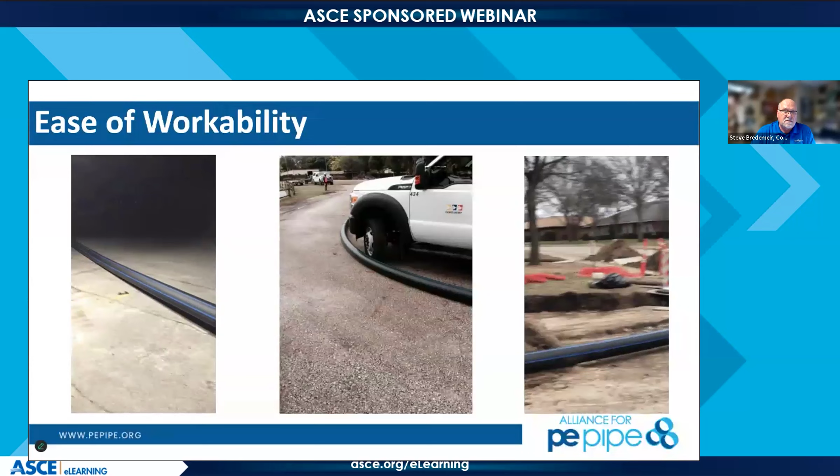Really easy to work with, and these examples show how we can bend it right around a corner. You don't want it scratching on something and making a gouge, so you bend it around something soft. It takes a little bit of getting used to at first, but as soon as contractors learn the nature of it, they're very good at figuring out how to handle it.

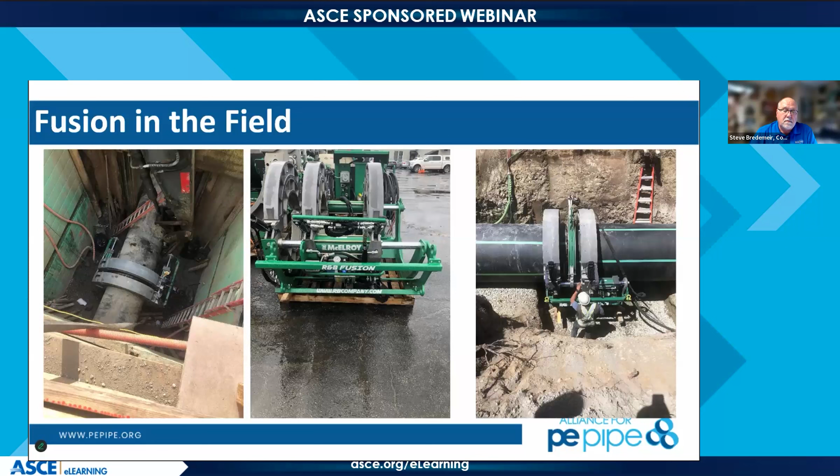Over the years, field fusions have been developed so we can do almost any size in-ditch fusion in very tight spaces. The only caveat to an in-ditch butt fusion is that one of those pipes has to be able to move about 6 to 8 inches, depending on the size of the fusion machine. But all these things have been developed over the years and have created opportunities to do things that we couldn't do 30 years ago.

We can probably go to the next one. Yeah, so there's the poly horse that stacks the pipe before the fusion machine, so a one-man operation can load, and on the other end they're pulling out the stringer—they typically fuse together 500-foot stringers if you have the space. Then you can have an excavator open up the trench and roll it in once it's fully cool.

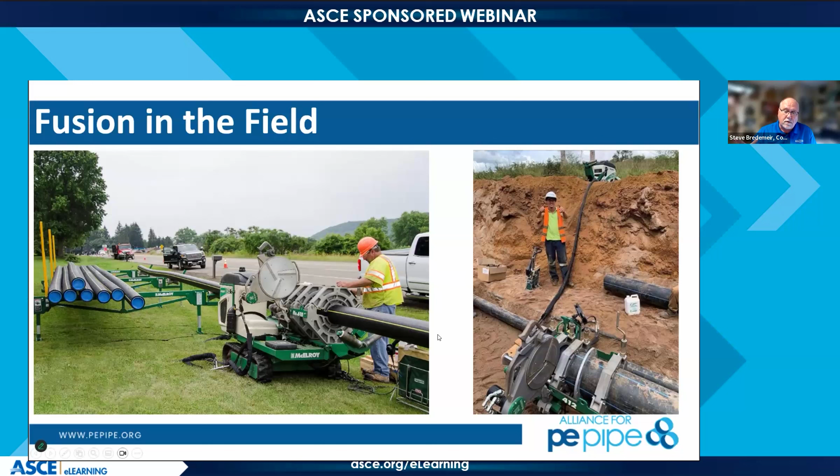Back to Alan's point or question earlier, the rule on cooling time is 7 minutes per inch of wall thickness. So if you have a 1-inch thick wall, the minimum cool time before you pull it out of the machine would be 7 minutes.

Just like other projects, you want to flush it and do your bacteria test. Running a poly pig through the line is a great way to clean it out. It's a very effective way to clean it out.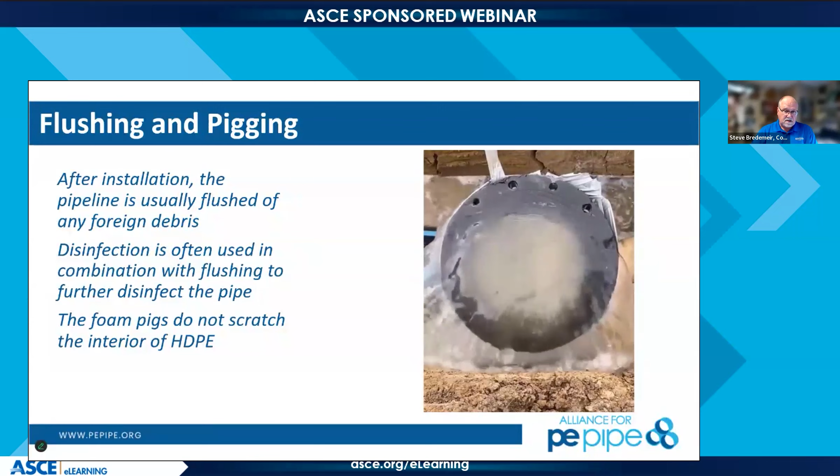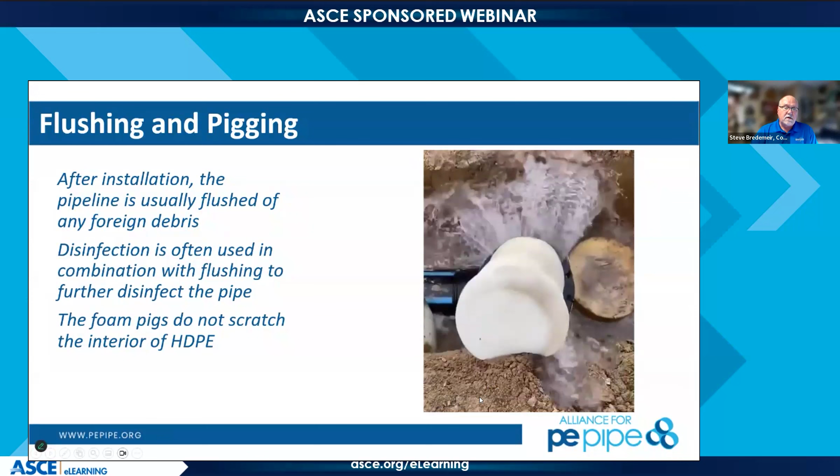These are the things you want to consider adding to your spec if you design an HDPE job. That's a great video that shows how the clean water comes right behind it and cleans out a new water line before you put it in service.

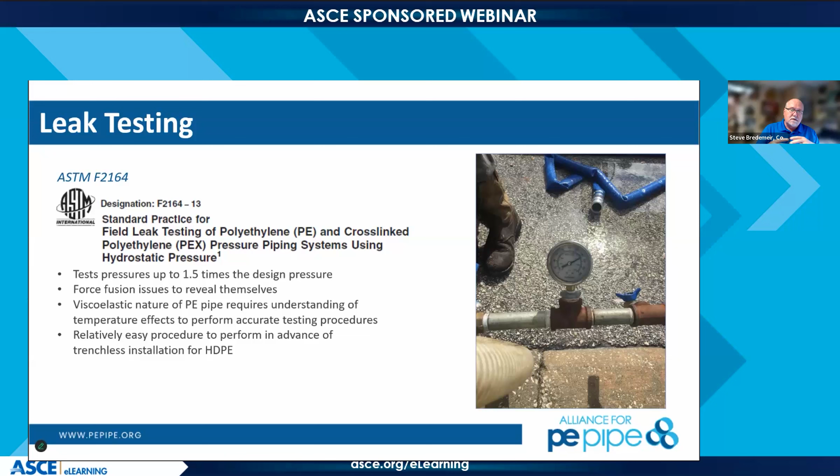Pressure testing or leak testing is very similar to other piping products, but we suggest you reference this leak testing spec because there are slightly different things about polyethylene. It's a leak-free system, but you do have to add makeup water when you're getting the pipe to relax into the pressure you're testing at. This procedure allows for that and is the best procedure for leak testing HDPE. It only has slight variances from your other leak testing specs.

This is testing the pipe before it even goes into the ground. Above ground, the pipe behaves differently because temperature changes cause the pipeline to grow and shrink, so you need to make provisions for that when doing pre-chlorinated testing. This is pipe being tested before it gets installed via pipe bursting or slip lining. Often, thermal effects will expand that pipe, so it'll grow in OD, but it'll also lengthen. That expansion allows for additional water to go through. While that's not a leaky pipe, we do allow additional makeup water.

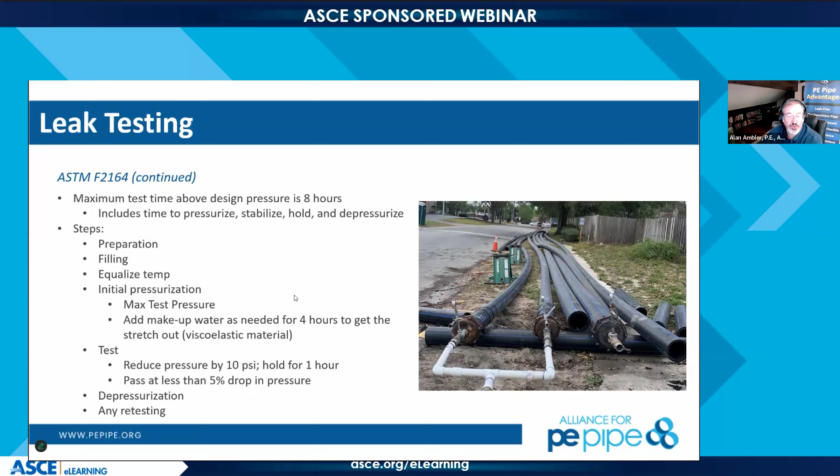What we do for nuance in the field is pressure test in the morning if we're in a hot environment, especially Florida, like some of the areas we see here as well. Those types of things are understood once we know the pipe material, and it's just nuance to be able to push everything through in that manner.

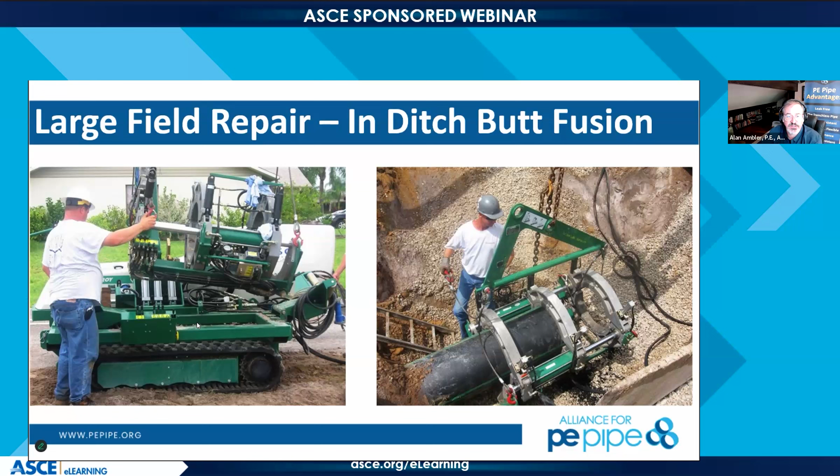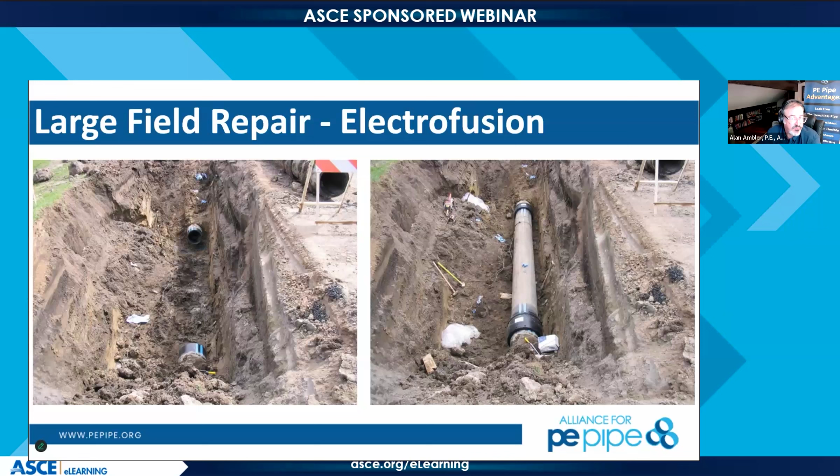Here's just some more pictures on that in-ditch butt fusion. These trenches are excavated to provide safe working space for the employees working with the pipe. The actual trench width is not totally dependent upon the pipe diameter itself—it's basically for safe working areas as we look through. All of the machines are designed to be taken off the chassis and lowered into the excavation to perform either that butt fusion or, in this scenario, that electrofusion we're looking at. So there is no excuse for a contractor to not be able to perform a repair or an installation. All of this equipment really is set up in order to be able to do so.

We're going to look at two projects now in Fort Lauderdale, which became somewhat of an approval or champion of HDPE pipe through their process: the Prospect Lake project and an emergency project. Prospect Lake happens to be treated water—they're treating it at a wastewater treatment plant and then conveying it to another location for further treating, and that's a brand new project. The emergency project happens to be a result of a failure for crossing the Intracoastal. A pipeline force main was releasing raw sewage into the Intracoastal. We hate those stories just because of everybody's impact through that process, but I will say HDPE saved the day in some of these cases.

A lot of the things we've talked about so far—trenchless installations, flexibility, durability, the ability to use unique new installation methods for pipe procedure such as compressive fit lining—are the reasons why this pipe really rose to the occasion here. Fort Lauderdale suffered through some pretty significant failure, as I had talked about briefly, but they've selected HDPE to take water from a wastewater treatment facility all the way to a brand new water treatment facility for further polishing of that water.

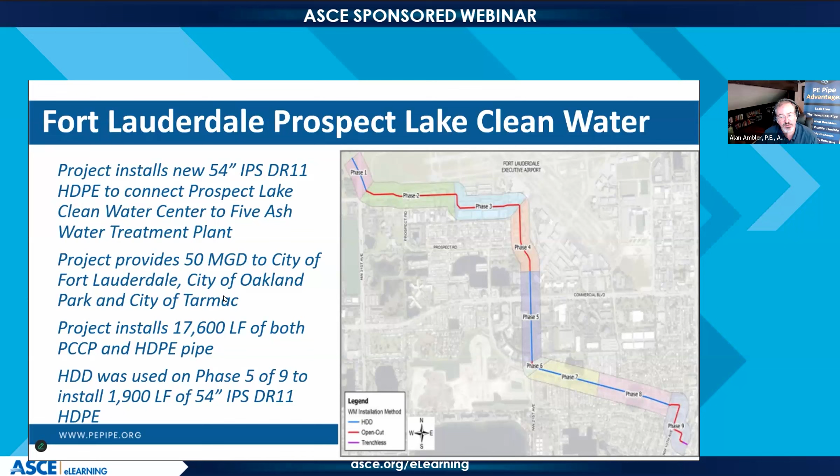Fort Lauderdale is a developed suburban and urban area with lots of above ground construction, so they chose trenchless methodology to install it. It's a 54-inch DR11 pipe through this process, so it's fairly large. Steve talked about low sag resins, and that low sag pushes us to give a much thicker wall pipe with even diameters and parameters, resulting in a thick wall, large diameter, high DR rating pipe. It's installed quite a bit on this project, and Fort Lauderdale was very committed to HDPE through this process and what they've learned over the years.

50 MGD of high quality potable water, turned in through multiple treatment processes to give us a brand new water source. In lots of areas throughout the country suffering significant drought, this is huge - exactly what we need to give us a new water source. 180,000 residents are supported by that 50 MGD.

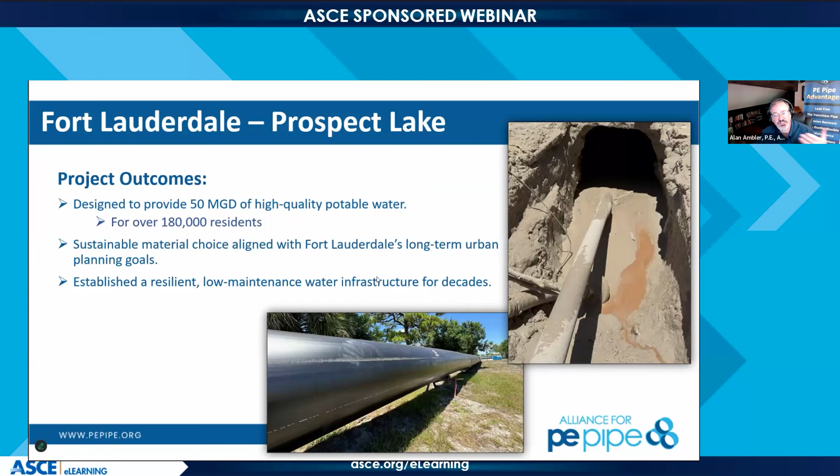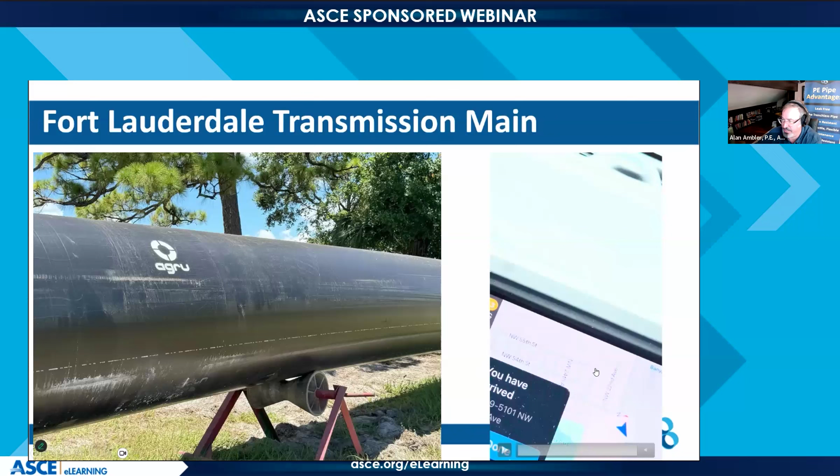We're using multiple trenchless technology methods to install this pipe. Here's an example of a fused run - they're using all those productivity tools Steve talked about to fuse this long run up, making sure we've got it in a manner to pull it in through trenchless installation, moving it from the laydown yard to where we want to go. Some of you have asked what's the longest run possible without some type of valve or connection, and this shows that the world is limitless here.

This shows the wall thickness for this pipe, and there are tools to fuse this pipe together, as you're seeing on the left. There is equipment to do this as we stage up into much bigger pipe - the logistics are larger, but the fusion process, parameters, and thinking are all really the same.

You can see here that this tool effectively works with the equipment on site to pull that pipe out of the fusion zone and load up the next pipe to be fused in that run as we go through. That 7 minutes per inch is what Steve told you about regarding wall thickness, making sure we put the appropriate amount of time and cool down time afterward. And we're simply bringing this through.

Fort Lauderdale, as I mentioned, is a developed suburban and urban area. So when we looked at this emergency force main project, we now have all this residential area with gorgeous water views that had all this raw sewage released, unfortunately. The project did make the news. In 2020, they had several catastrophic breaks. A project like this has to happen very quickly, so they brought a design build team together to get to the fix they needed.

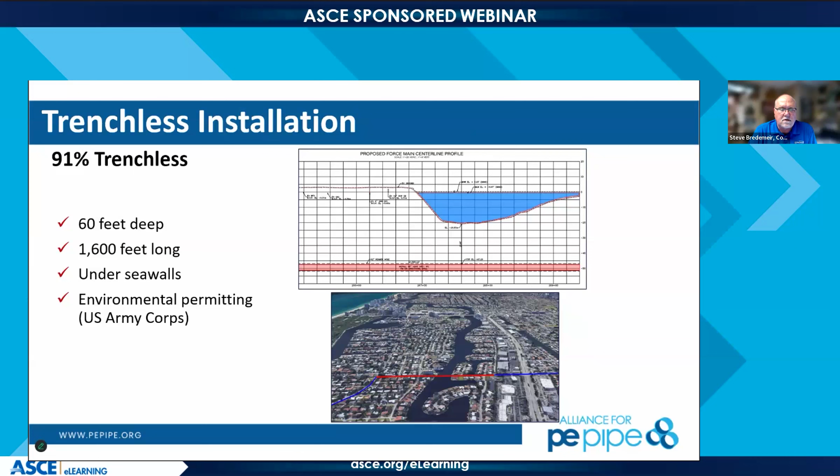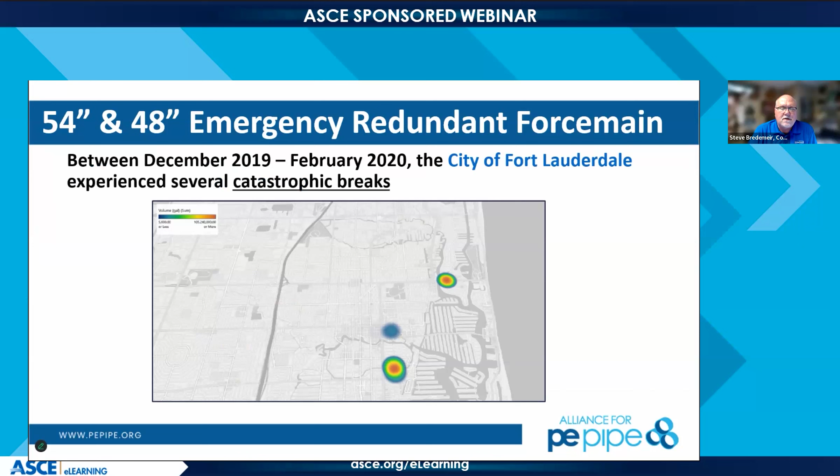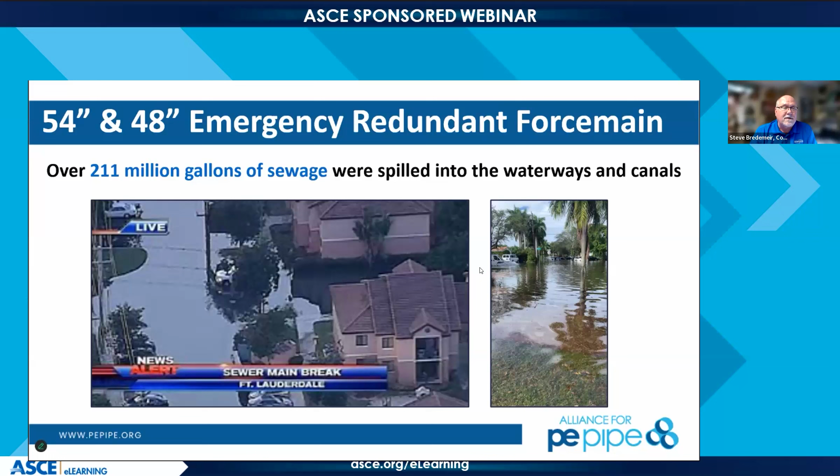I just think these pictures and these massive projects are so intriguing, and I love the problem solving that goes into it. Our industry has grown by leaps and bounds tackling such complicated projects. I had great experiences 10 years ago with chilled water projects for universities and things like that, and that's how we learn and grow as an industry. It's neat to see these large projects coming to fruition, with polyethylene pipe being the material of choice. It'll be there for hundreds of years, and they won't have the future catastrophic problems they're dealing with now. It's exciting for the industry.

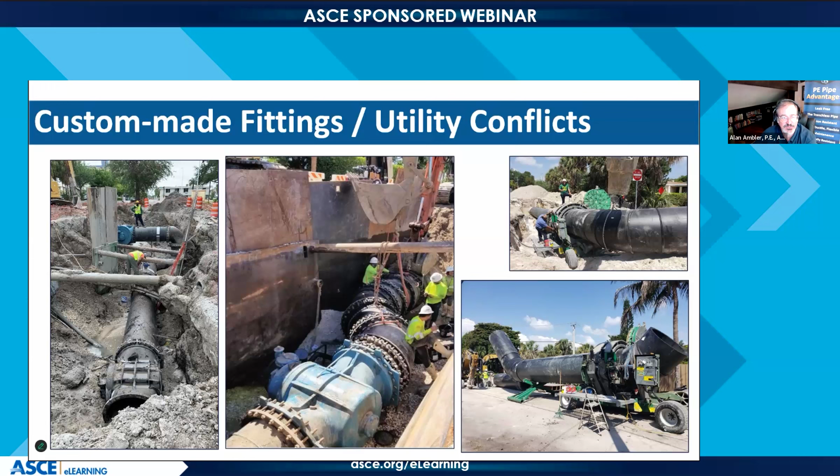We had a comment about the survey for the last webinar. Unfortunately, at the close of the last webinar the Alliance had, that's when that big hack happened. There were some 70,000 people trying to access Zoom who couldn't because of the hacking. I'm not sure why you would want to do that, but that's what happened. So this one, hopefully there's no hack ongoing right now. You should be able to see the survey just fine. We certainly appreciate it.

We had another question real quick from Hector about bringing road shows abroad. The Alliance for PE Pipe is actually looking to Argentina right now to set up an alliance for PE Pipe there. So we're going to ship Eric down there right away because he loves steak and he loves to go talk to Argentinians about high density polyethylene. I can't think of anybody better than Eric to provide us that source. Yeah, I can get there from Ohio too. I realize Houston's closer. I get it. Any closing arguments, Eric?